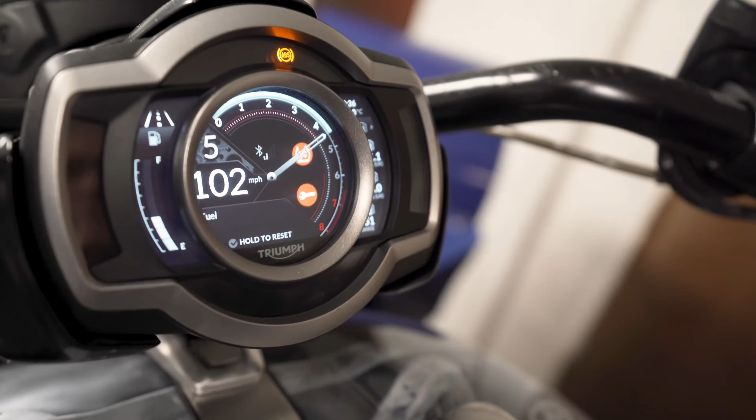Okay, so we've done a run with the DB killers in, we've taken the DB killers out, and now we're going to do another run, see what difference they make on this particular exhaust system, and then we'll de-restrict it from there.

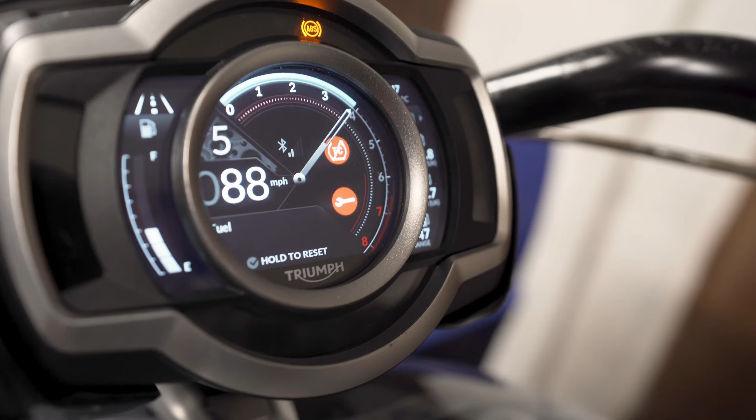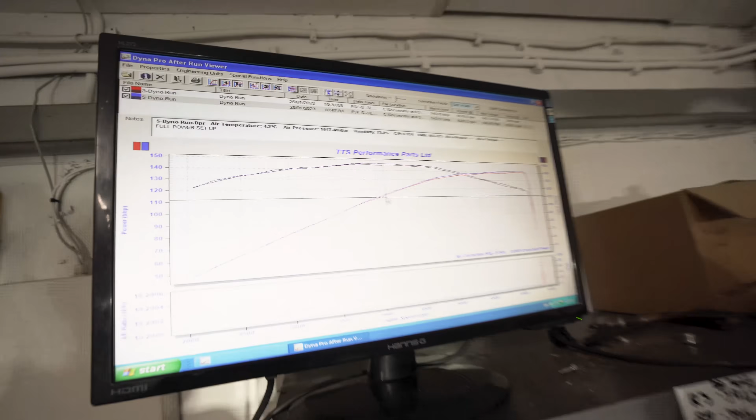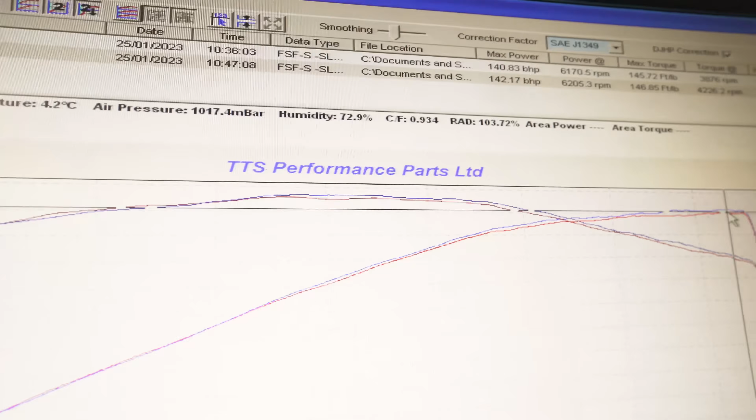Okay, so we've done run 3 with DB killers in, run 5 with the DB killers out, and there's virtually no difference in horsepower. And the reason for this is that the restriction is further back, it's back up in the headers. The headers have got very small outlet, and so they are more of a restriction than the exhaust system and the silencer system. So there's literally 2 horsepower and 1 foot-pound in it.

So now we'll do a bit of reflashing and see what power we can get out of it with full throttle, and then we'll put the DB killers back in, see if it kills it. Okay, so now instead of it only having 60% throttle, we're giving it 100% throttle, and we made quite an aggressive throttle curve. So all we need to do now is reflash it, ECU, reprogram. Continue. Okay.

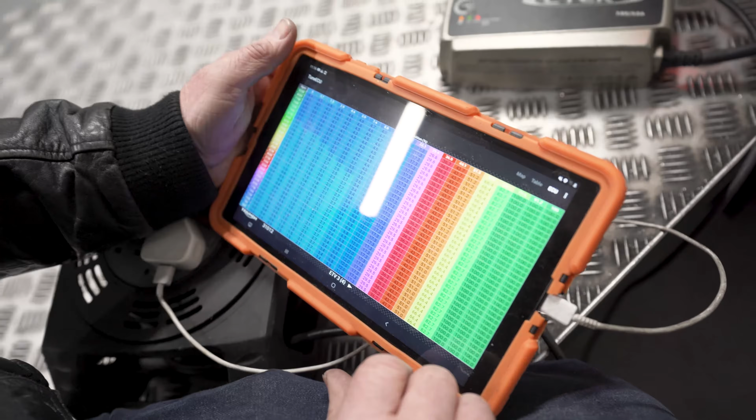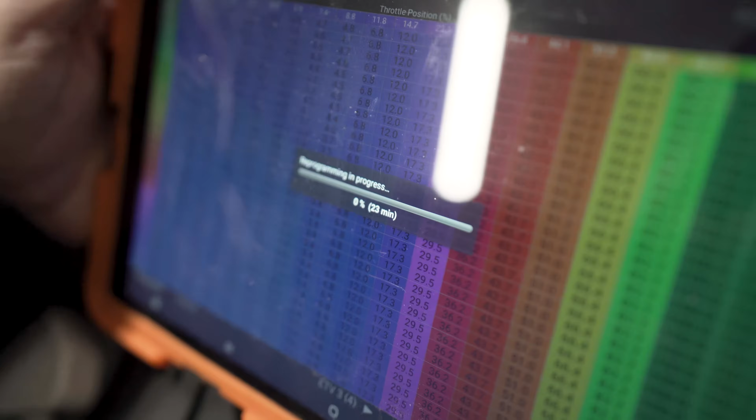Reprogramming in progress, and you will see it takes quite a while. Thinking about it, 23 minutes, there you go. So we've just got to go and get another cup of coffee and have lunch.

So when this is done, we'll see what power we've got, and then we'll put the DB killers in, and if it's not too disruptive to the power, then we'll leave them there. Keep Craig's missus happy.

Okay, so we've done the reflash. We now should have 100% throttle on the sport setting and normal road setting. Left the rain setting at 40% throttle just to keep it nice and stable in the tricky conditions, and now we need to see what it makes.

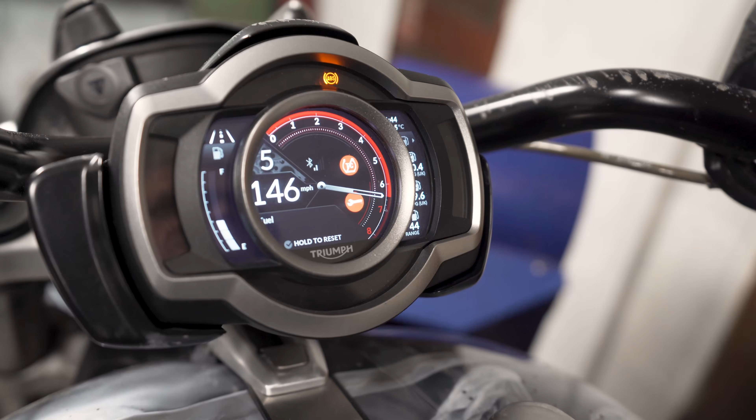That looks a bit different. So let's get rid of that one, move that run.

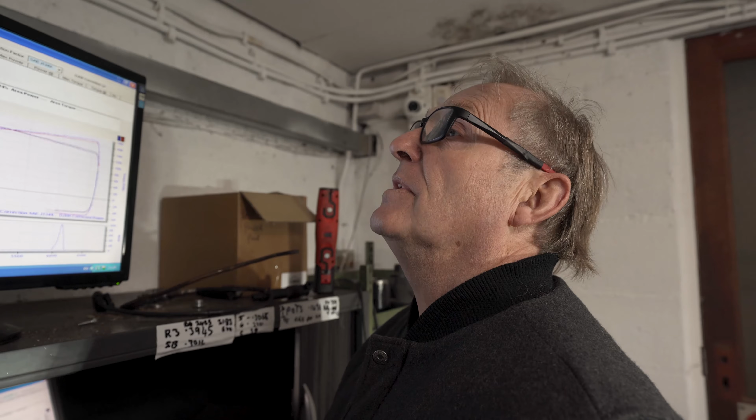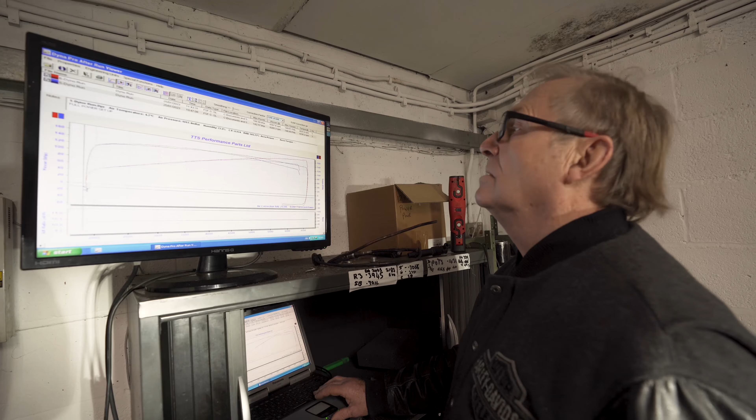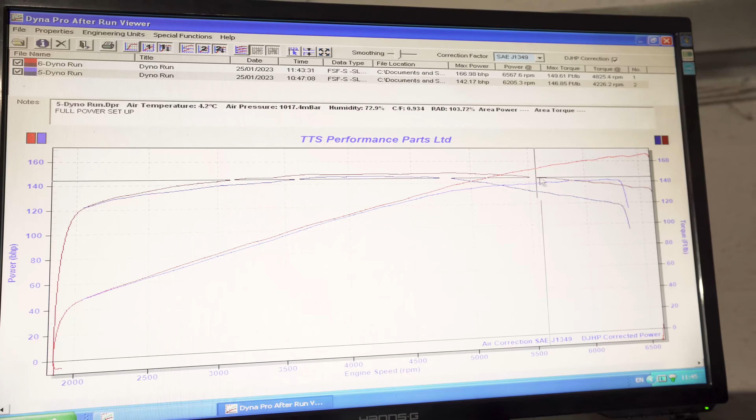Okay, so changing the throttle angles and see what we've got. We've picked up horsepower all the way through, and we've gone from 142 horsepower and 146 foot-pound of torque to 166 and 149, nearly 150 foot-pound of torque. So 24 horsepower gain, 25 horsepower gain. Very nice too.

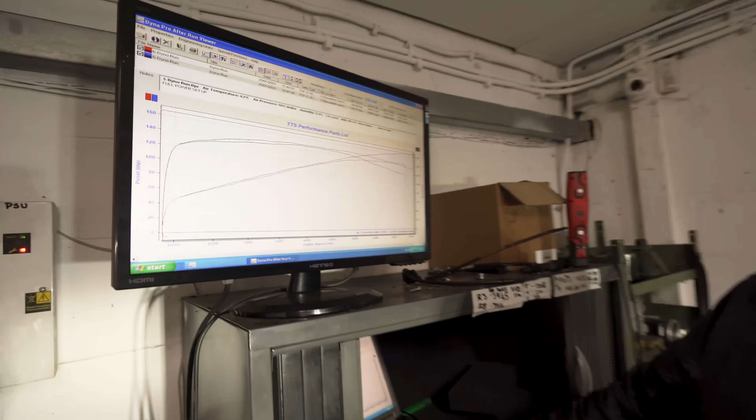We just checked the CO, so we'll put the sniffer in the back of the exhaust, make sure she's not running too lean, see if there's any gains to be had there. And then we'll put the DB killers in and see if it makes any difference to power as well. Great.

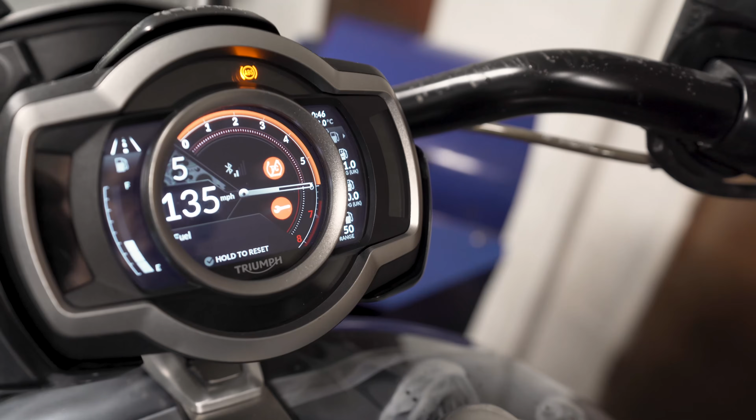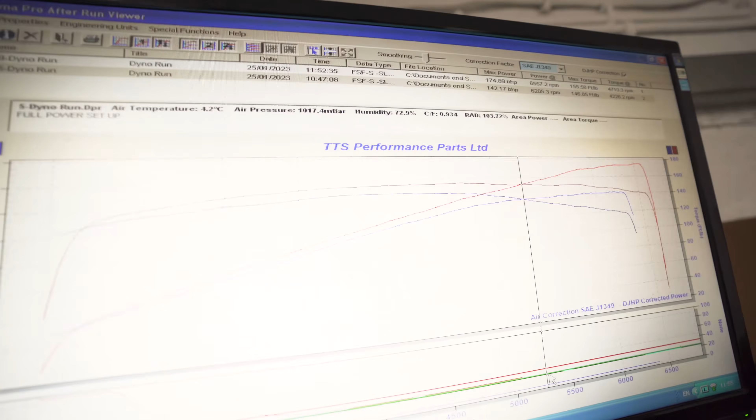With a bit of tweaking on fuel, we're now running 175 horsepower as opposed to 142 and 155 foot-pound of torque instead of 146. Mixture strength is still a little bit on the rich side. You see down here we're at about 12.5 to 1 air fuel ratio.

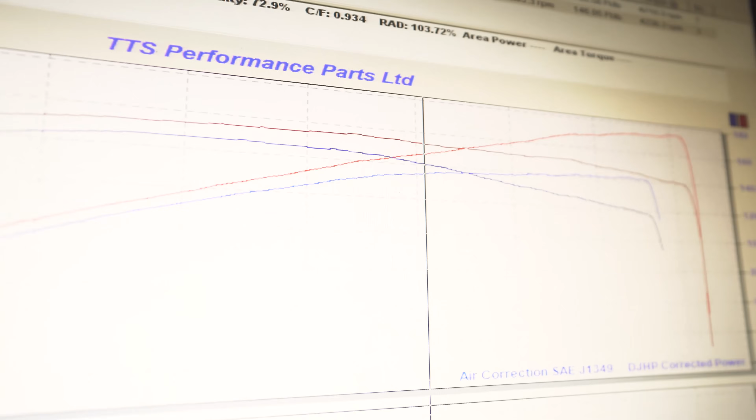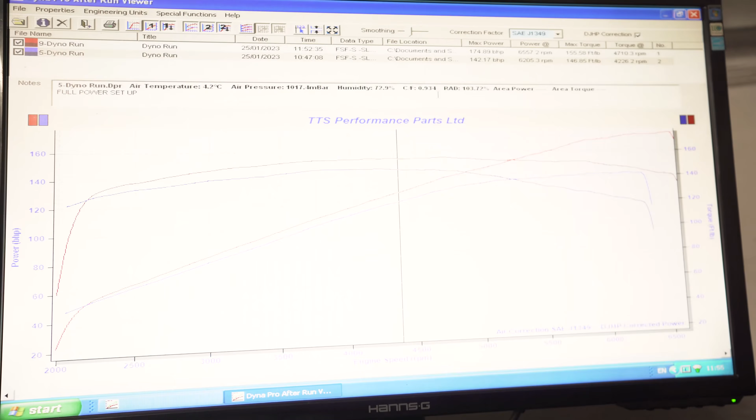But the air is forced into this airbox through the two vents either side of the headstock. And that's going to make a little bit of difference. It's going to push a little bit more air through than we're getting on the dyno. So I'm going to leave that as being safe and certainly making a good change in horsepower. So I think that's pretty damn good. Look at that. 33, best part of 33 horsepower gain.

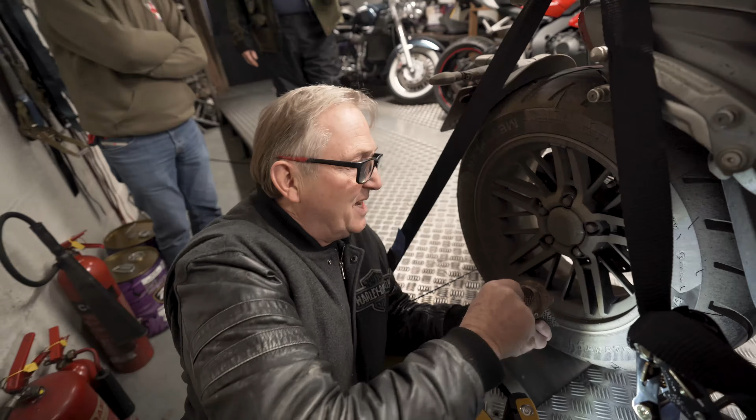Got rid of the speed restriction, so it revs out right to the limiter in 5th gear with full throttle as opposed to the throttle dipping away and causing it to nose over at the top end. Craig ought to see a difference. So I don't think we need to do any more. I think we're there. Oh, we could put the DB killers in and see what it does. Okay, we'll do that. All this mud in the exhaust. That whole thing was all shiny the same.

You've got to say what kind of a day it is today, Rich. It's absolutely... what is it, about -3? This is bloody cold. Good for horsepower, not good for well-being. Yep. Need a few more dyno runs to warm the dyno room up.

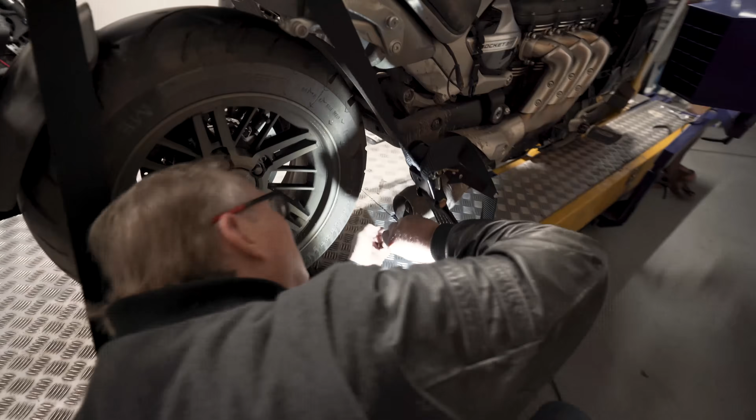I'm only going to put one bolt in because we're not keeping them in. Is that right? Yeah. Are we happy with that? Yeah.

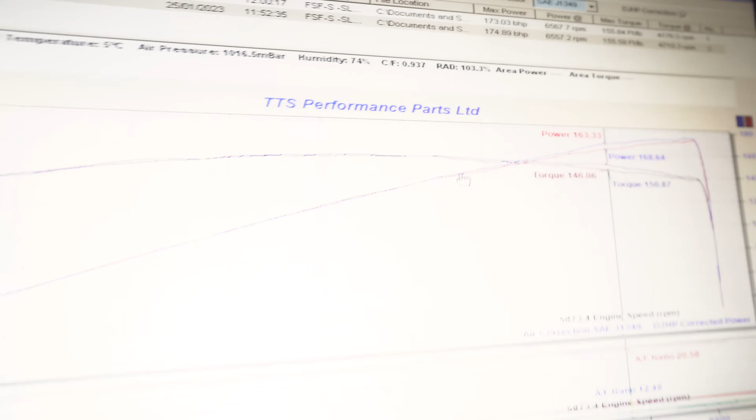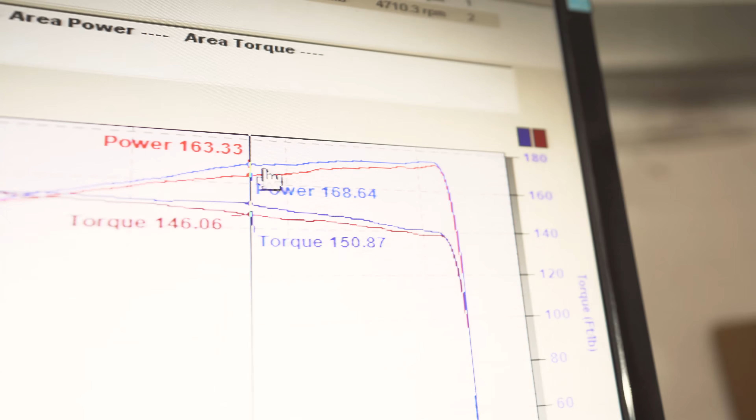Okay, so we've run with the DB killers in, full throttle setting, so as we intend to leave it, but with the DB killers in. The difference in horsepower between the two: the blue line is the unrestricted and the red line is with the DB killers in. The biggest difference is here, which is about 5 horsepower. To be honest, for the lack of noise, it's not worth a lot having the DB killers out. So you might as well leave them in, I think, and keep the missus happy. Keep the missus happy, eh?

So we'll put them in properly. But like I've always said, the restriction's not in the silencer, the restriction is in the headers. The headers are so tiny internally. That's where the restriction is, so it doesn't matter a lot what you do past the headers, it's not going to make a lot of difference in horsepower, and that just proves the point. You might think 5 horsepower is a lot, but it's not huge. Not with a big torquey motor like this pulling 155 foot-pounds of torque. Yeah, that's quite nice, isn't it?

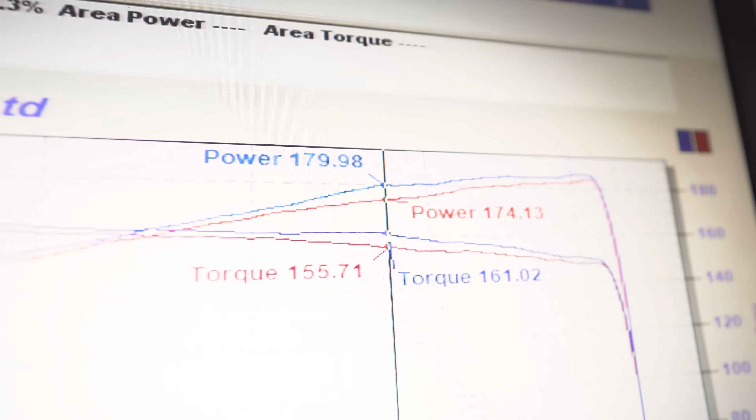And that's correcting down 6.3% today. The actual horsepower on the day is just under 180 horsepower, 179.98 horsepower with no correction. Nice job. So, job well done, I think. 30 horsepower gain at the end of the day. No speed restriction, so full throttle in 5th and 6th.

Good luck in these conditions. But it's still got the rain program, so it's still got a nice progressive throttle in the rain program, and that's all you need.

Just gotta do my reversing tactics. Anybody think I hadn't done this before? Too cold for this. Yeah, too cold for this. Yeah, beautiful paint scheme. Absolutely.